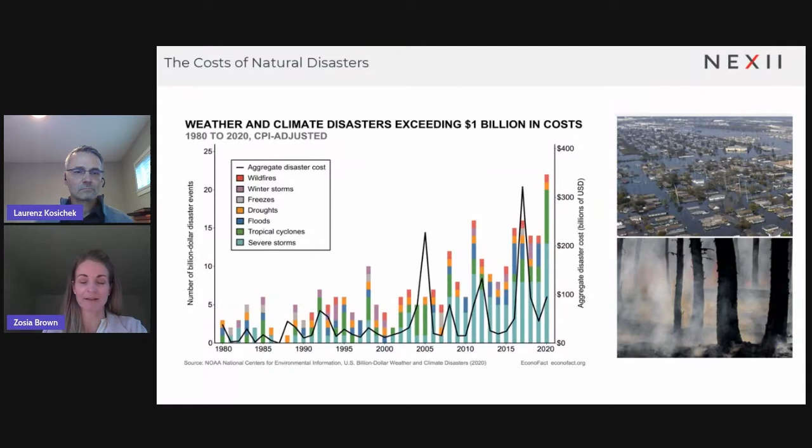Buildings and construction are a key part of both the climate crisis and climate solutions. We know that our industry represents 39% of global CO2 emissions, and that comes down to how we heat and cool our buildings, construction-related emissions, waste from demolition, and emissions tied up in the materials we select.

That number's been ticking up by 1% per year since 2010 and will continue to increase because we're building new buildings at an incredible rate.

The volume of buildings on Earth is expected to double in the next 40 years. That means it's absolutely critical that we design new buildings right, but also 100% of the buildings on the planet today are existing buildings. So we need solutions that can scale for both new and existing buildings to help us on the net zero pathway.

Materials are a huge contributor to this challenge. Cement in particular is a large emitter of global CO2, representing the 3rd largest emitter in the world if it represented a country. Steel as well, and this is important because the building sector is considered a market pull for materials. We consume up to 90% of concrete globally and 50% of steel.

There is a lot of pressure on these industries to innovate themselves, but it's also on us as a building industry to create innovative designs that favor low carbon materials.

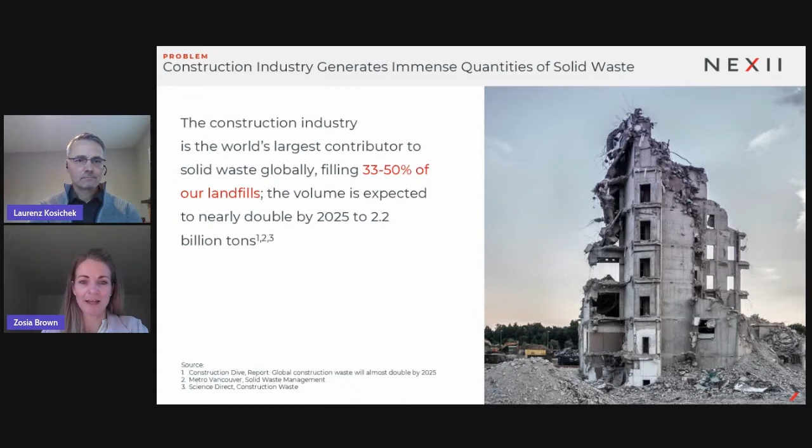And so we need to be thinking about both operational carbon and embodied carbon aspects of the built environment. Operational carbon means the emissions tied up with how we heat, cool, light our buildings and generally keep them running. The embodied carbon portion is emissions associated with extracting materials, manufacturing building products, transporting that to the construction site, assembling buildings, and the end-of-life emissions as well.

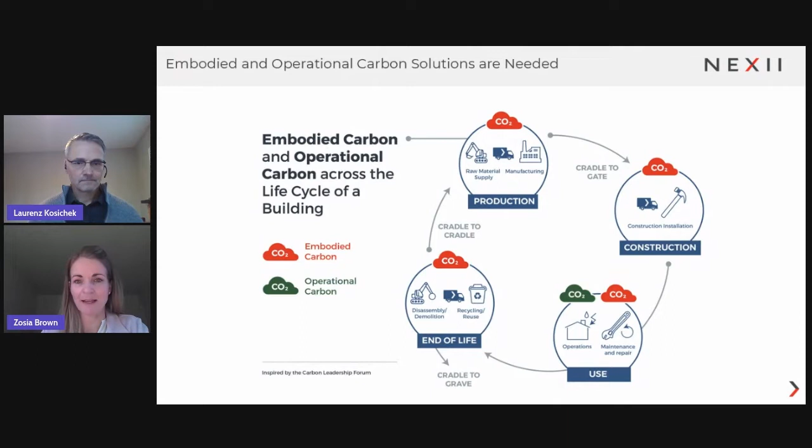We used to think that embodied carbon was a much smaller piece of the puzzle, but that is starting to change. This graph by the Carbon Leadership Forum shows where the key impacts are from embodied carbon.

First and foremost, it's right up front when we produce building materials and construct our buildings. And then you have a couple more hits during the building life from renovation and maintenance.

But what you see in the blue is that, whether the building is a standard performing or high performing building, operational carbon emissions are trending downwards. That's because our buildings are getting more energy efficient by code, and the energy grid is gradually getting cleaner.

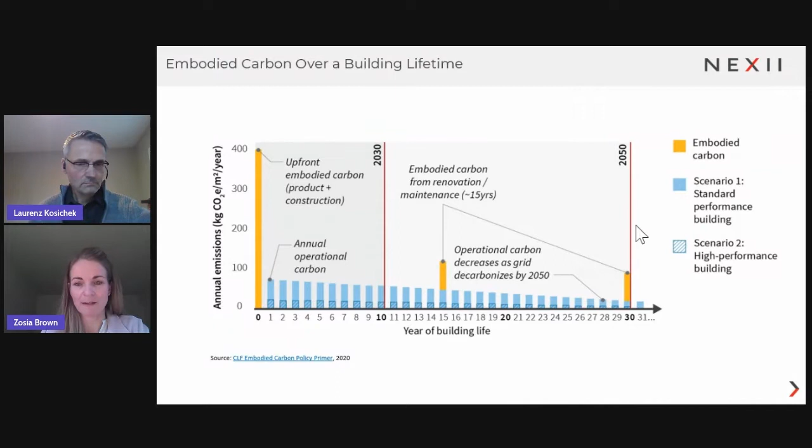So that means embodied carbon emissions are going to take a much greater role as we evolve here. AIA and Architecture 2030 estimate embodied carbon will represent 50% of building-related emissions by 2050. So that's just an overview of a number of global mega challenges we're facing and how NEXII is specifically aligning ourselves to meet multiple of these challenges at the same time.

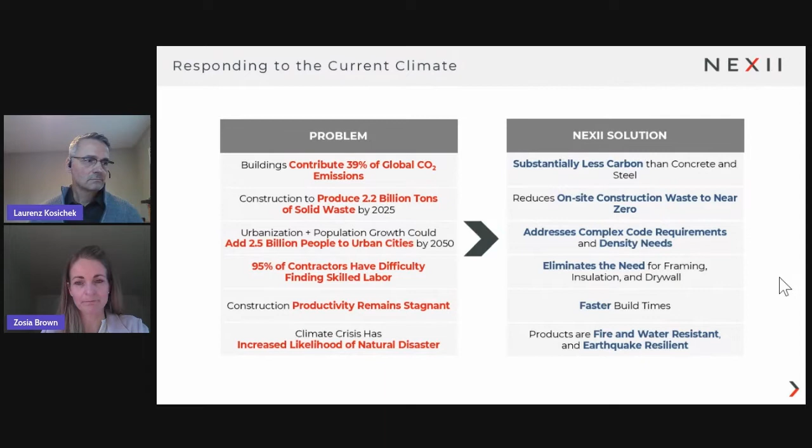So where do we need to be by 2050? Well, science tells us that if we want to hold off on some of the worst climate impacts, we need to limit global temperature rise to 1.5 degrees Celsius above pre-industrial levels.

And to do that, there's two numbers to bear in mind: one is half current emissions by 2030, and two is net zero emissions by 2050. What we can see from this graph from the IEA, which just came out last spring, is that our window is incredibly narrow. It is this decade that we need to really shift and decarbonize all sectors of the economy to get on this net zero pathway.

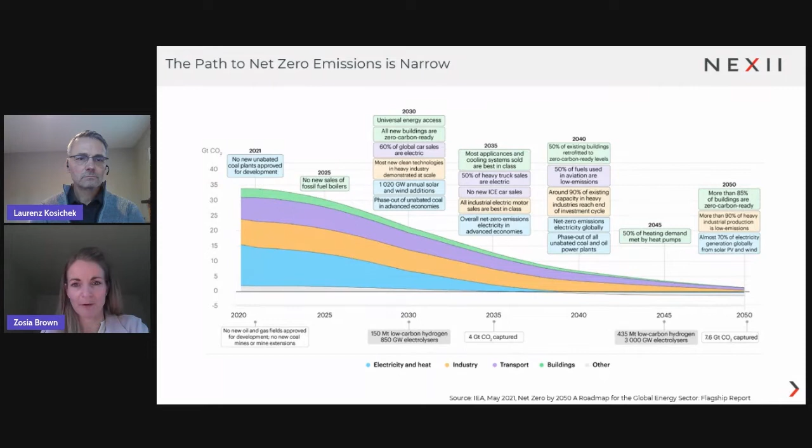So we're talking about massive deployment of all available clean tech within the next nine years, and tripling the speed of efficiency progress. Buildings are a key part of that. And the good news is that we know near-term emissions reductions really do work—every ton of GHG we avoid really does slow down global warming.

So for buildings, it's about energy efficiency. It's about reducing demand first. It's about electrification, providing that energy from clean, renewable electricity. And if we can generate that on building rooftops, even better. There's also a big piece around behavioral change—how we consume energy in our buildings, but also the behavior of designers and the building industry in selecting and designing to support low carbon materials.

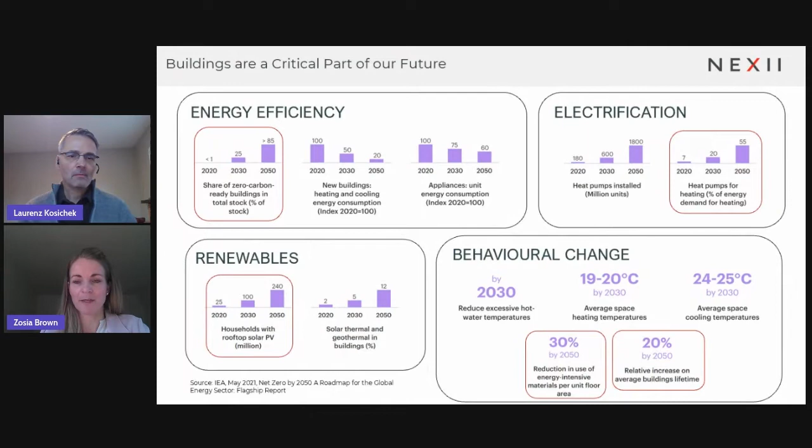So in summary, how do we get there by 2030 or 2050? Really thinking about low embodied carbon materials, zero emitting new construction and renovation. We want all new buildings to be zero carbon ready by 2030, and the vast majority of existing buildings to be zero carbon retrofitted by 2050.

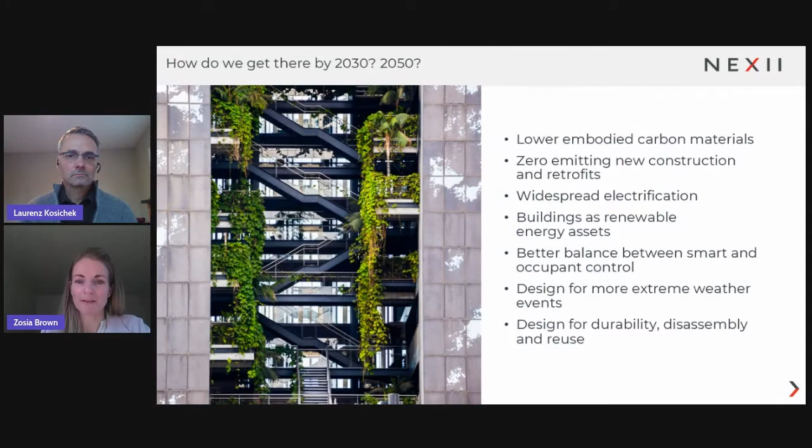We've talked about electrification, renewable energy, getting a better balance between smart and occupant control, and then really designing for more extreme weather events and an increased range of environmental conditions, as well as designing for durability, disassembly, and reuse—thinking really hard about embodied carbon in buildings and whether demolition is necessary.

The good news is that momentum is building to support this net zero carbon transition in our sector. We know that, thanks to the creativity of the design and construction community, we can achieve zero emission buildings in any climate worldwide now.

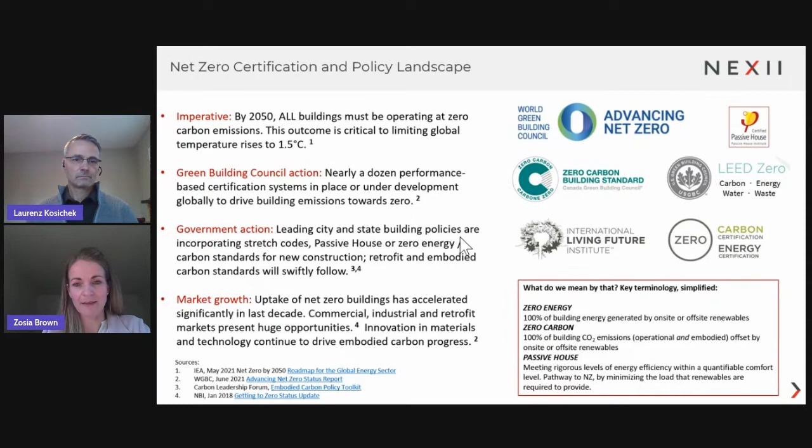And so we're seeing a real alignment around the standards landscape here, whether it's CAGBC, USGBC, or the Living Future Institute—BREEAM and others are all really aligning around this zero target: zero carbon, zero energy, and zero emissions. And likewise, the government sector and policy is also aligning around this effort.

Lots of momentum building with city and state policies leading the way. We have ASHRAE and IECC both anticipating net zero performance to be required in their next set of standards—California, Washington DC, and here in BC we have a step code for buildings where the highest step is zero energy ready, that's for all new construction by 2032. So really great momentum supporting the transition.

Unlike the automotive sector, the building sector hasn't focused on performance metrics historically, and buildings aren't often designed to be able to track performance and use.

Examples like step and stretch codes, zero emission policies, passive house standards—a great example—and net zero certification pathways are shifting that. So we list a number of performance metrics here: total energy use intensity, GHG intensity, that are going to be much more important for the building sector to start to produce on a regular, consistent, and verified basis.

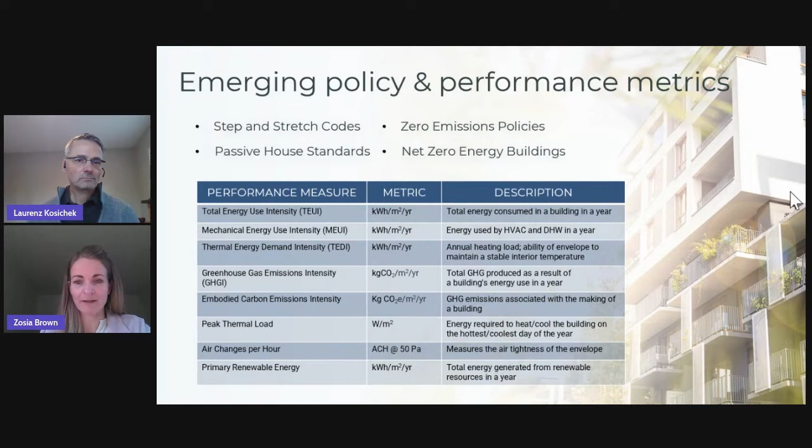And embodied carbon is included in that list as well, as being one of these emerging metrics that we're going to be paying closer attention to.

So what is, how do we measure embodied carbon? Well, it's life cycle assessment, LCA, which is a framework for measuring the impact of a building or a building product across its entire life span.

And the goal of LCA is not only to create data, but also to facilitate decision-making from a designer standpoint, but also in specifying materials.

And so EPD, or environmental product declarations, are the sort of emerging nutrition label for building environmental products. And that tells us how much embodied carbon is tied up in a unit volume of a building material, so we can compare between similar types of products. And EPDs are proposed for use in procurement, as well as supported by national and international databases.

And the reality is that many companies have no idea how they're going to hit their targets. So to date, we know that 50 countries and 21% of the world's largest corporations have net zero targets in place. And net zero is really based on a planetary perspective.

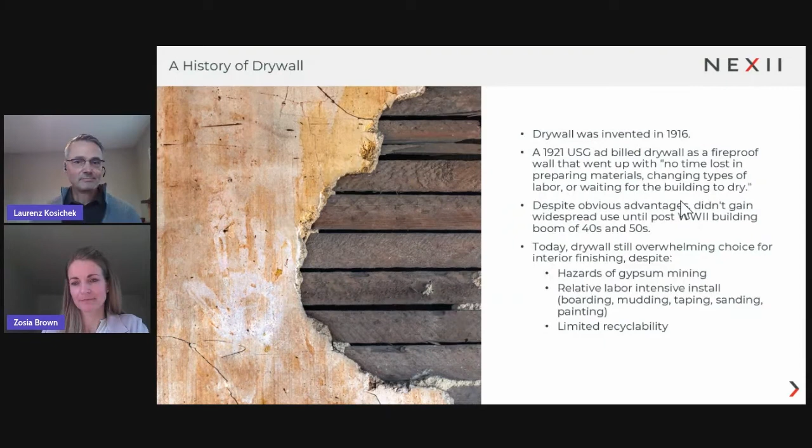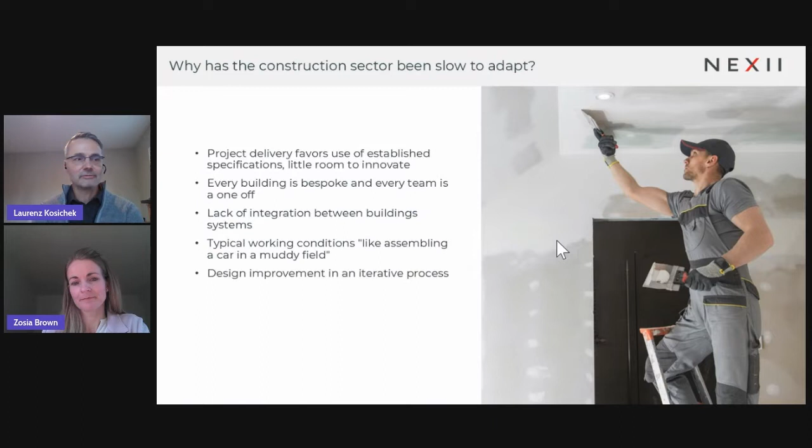So the industry itself favors the use of established specifications, and therefore established materials. The A&E industry is really risk averse in a lot of ways, and new materials are difficult to get accepted.

Additionally, every building is a one of a kind. I myself have practiced for close to 25 years, and have never built the same building twice. And even if I did, it would be a completely different team of contractors building that. So on almost every building, there's some new learning that goes on.

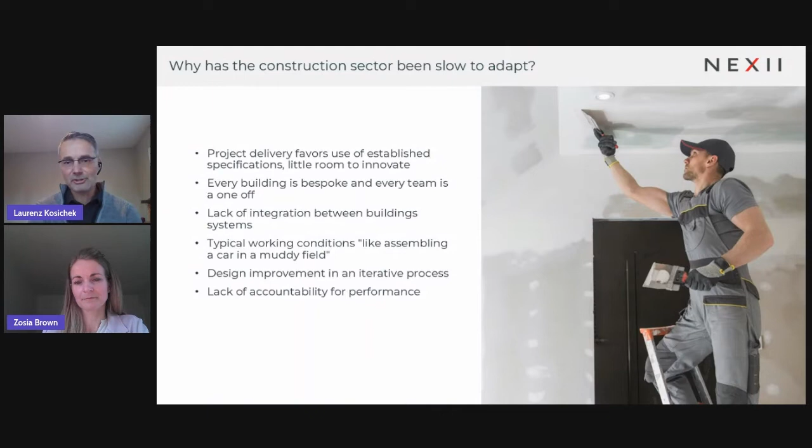And of course, we all know that there's a lack of integration of building systems in the buildings themselves, and oftentimes we're not even designing for that. Generally, on a construction site, the first trade to get in there gets the best location to run their system. All others that follow have to work around them.

And for all of you that have been on a construction site, that fourth bullet about putting a car together in a muddy field sounds fairly accurate. Definitely on a lot of the sites that I've been on.

So design improvement is an iterative process, and you can't do that when you're always doing a one-off. And lastly, there's obviously a lack of accountability on performance. Those of you in the A&E industry have likely seen projects where deficiency lists are like small novellas, and often take months and months to get through.

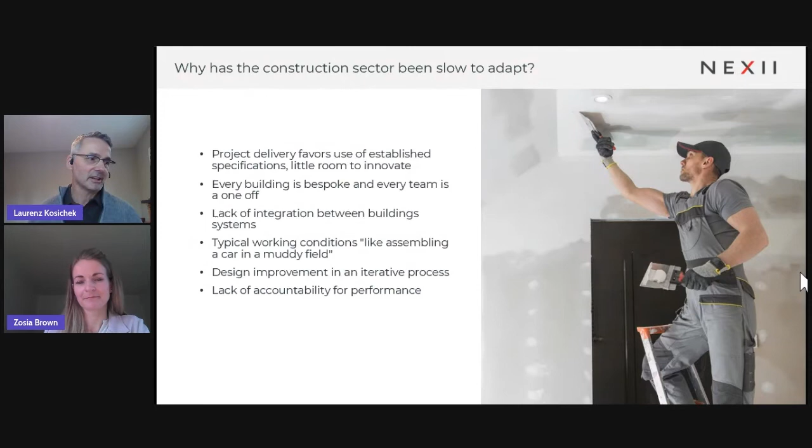So let's look at a panelized solution for today's design challenges.

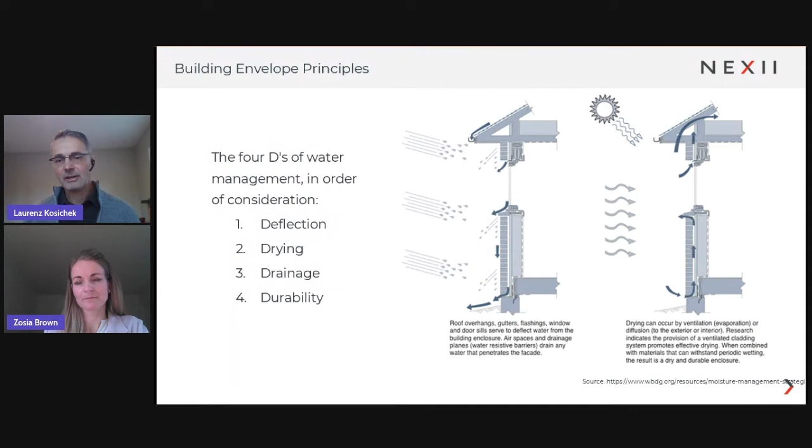I think this is a great slide. It really points to the complexity of our building envelopes at this stage of the construction and design industry. There's a lot of challenges with them.

The thermal layer, where do you put that, and how do you make sure that it's continuous, especially when you have structural components that have to go through? Where does the air seal go? We have at least 2 layers of insulation here. Does it go on the inside, in the middle, or on the outside? How do we deal with all the sealants and flashings, etc., and make sure that we can keep the water out?

And then how do we take this assembly, and there's about at least 12 components before we even get to the brick veneer. How do you transition that to a punched window frame, or a curtain wall, or a window wall? And then how do all of these components interact dynamically in varying freeze-thaw conditions and all hold together?

Now, the upside to that is exactly this diagram. We now live in a digital age where in the A&E industry, we model everything in 3D. And in fact, these sort of 3-dimensional details have found their way directly into our contract documents. We need them because when you are in the field doing this work, if you don't actually understand the 3-dimensionality of it, you'll never be able to get it right. And getting it right is the most important part of our building envelopes.

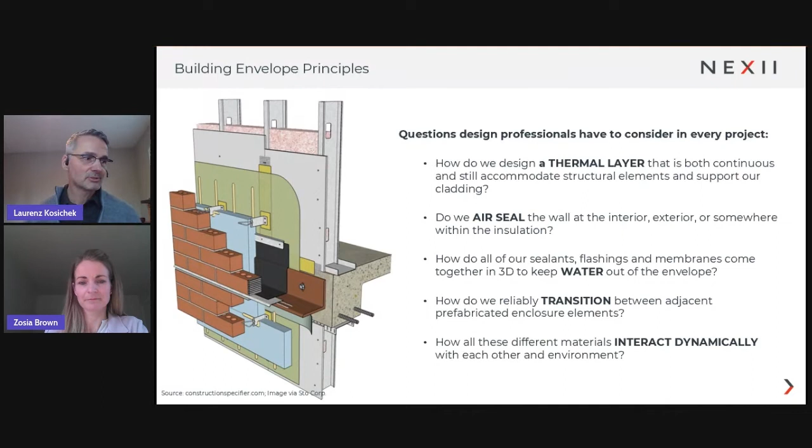So let's move on to some examples of conventional building envelope materials. I would argue that the ones on the far right, the curtain wall, window wall, or ornamental fiberglass, these theoretically could be whole building envelopes. Certainly there are lots of examples of curtain wall buildings that are completely wrapped.

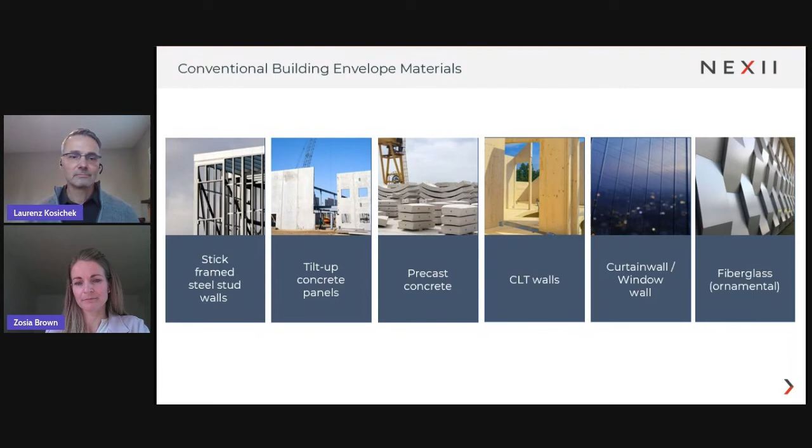I guess the ornamental fiberglass, maybe that would be a really funky TELUS data center that doesn't really need any windows, and so could become the entire envelope. Now the 4 on the left hand side are really components of a building envelope, but they're not the whole envelope. And that's part of the problem - they just deal with a component of that.

So let's move on and let's look at what Nexii has developed. I'm going to admit these photos are a little bit old, 3 years. That's a long time in Nexii time.

The photo on the far left, you're looking at two components, two panels attached together with two different finishes on it. The reality is with casting into form liners, we're able to cast a number of different textures into our panels. By applying paint or various colors of paint, we're able to achieve different looks and textures on that surface. The panel in the middle is showing the backside, and the darker color is actually the color of the Nexiite. We would generally send it to the site with a primer coat on it so that the finish coat could be installed on the site.

You'll notice these HSSs in the corners, called corner blocks. We have developed our connections further than this older image, but it's really the same process. We bolt our panels together, we bolt them to the foundation, and we bolt roof panels to wall panels. It is fully like a large Meccano set, for those of you who remember that.

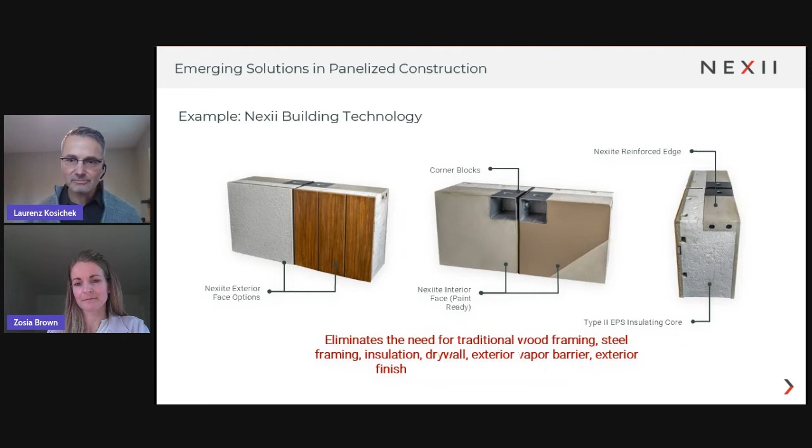This gives you a little more detail on the actual sandwich of that panel. Again, on the left side, the exterior face, all the things I described: the face, the rain screen, the Type 2 EPS core.

We add a layer of FS, which is our version of Nexiite for fire and sound. Half-inch of FS provides a half-hour fire rating, and then we have another layer of ST on the inside. ST stands for structural, so we have a structural skin on the outside and a structural skin on the inside. That structural skin ties to the thickened edge and often all the way around to the exterior face as well. With 8.5 inches of EPS Type 2, we get our R-34.

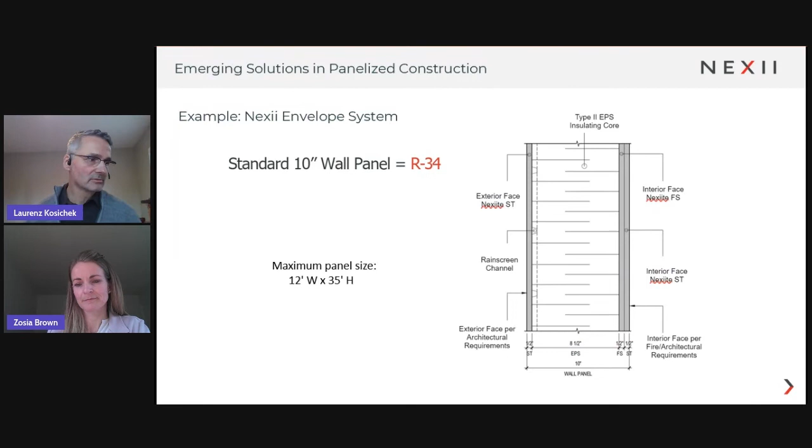Our maximum panel size is approximately 12 feet wide by 35 feet in height or length, and our panels can go horizontal or vertical. Let's head to the next slide.

So what are the advantages of a Nexii panel or a panelized solution? I love this first one, material supply chain predictability. That was probably accurate when it was initially put into this slide deck. As we all know, that is not the case today. However, in the future, as Nexii grows and locks down consistency in the types of panels we're producing, we'll be able to buy in bulk well in advance of projects arriving through the door.

So that we have product on hand for our panels. The rapid assembly is obviously key here. Typically, a panel can be installed in about half an hour, maximum time. And of course, that gets us to closing the building in as quickly as possible, which is always a desired effect. There's a higher potential for systems integration, and we do that quite often. Any penetrations through our panels, we like to coordinate all of those in advance.

I talked about manufacturing in a facility. In fact, our Moose Jaw facility is ISO certified, so there's a high degree of quality control and quality assurance. There's definitely cost savings available when there is repetition of a panel—then it gets easier for us. One drawing that can make dozens of panels obviously makes life easier. There's significantly less construction waste in our process than conventional construction, and the repetition of the process gives us an opportunity to learn, innovate, and make it better.

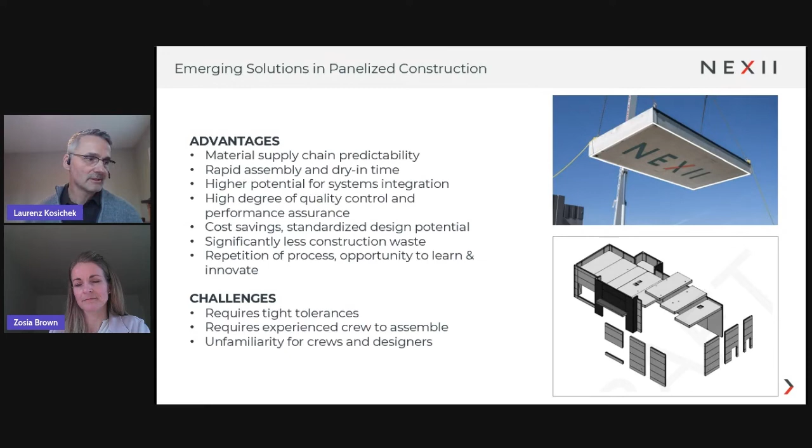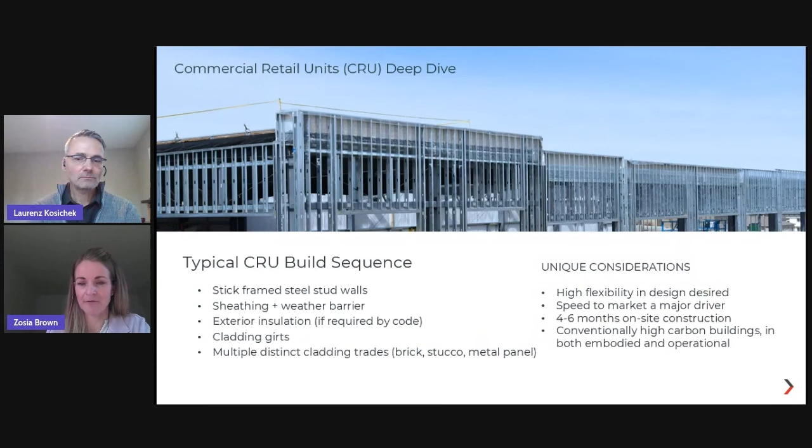Conventional CRU, or commercial retail unit, buildings tend to be high carbon, typically made out of concrete or steel stud, high in both embodied and operational carbon. They can take 4 to 6 months of on-site construction, where speed to market is a major driver, and generate a ton of waste along the way. So here's a video of how our Starbucks came together.

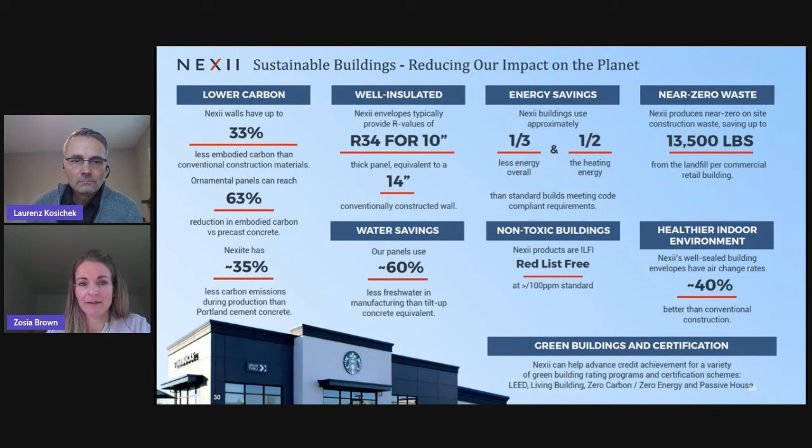It's a snapshot of our green metrics to date, kind of averaged across our projects. We're committed to tracking our performance, the performance of our panels and the buildings we produce, for every project, and working with third-party verification for as many metrics as possible across the board—embodied carbon, water, R values and air tightness, energy savings, and healthy materials.

So what's next for Nexii? We're looking at an example of an integrated technology partnership we've got with a number of key marquee companies, including Siemens, Trane, and Honeywell, where Nexii provides a very high-performing building envelope, and we work with leading technology companies to help us with extremely high-efficient systems, building controls, smart appliances, integrated solar PV, etc.

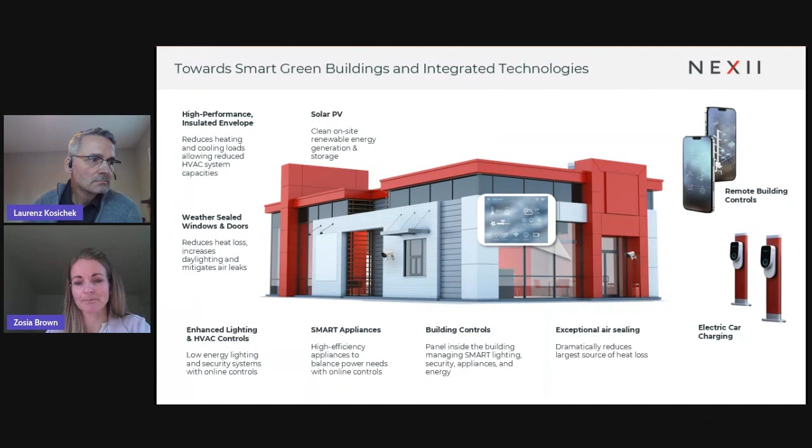So essentially, it's a kit of parts that's net zero ready, and this is something we've got actively under development, hoping to deliver our first building of this kind by the end of the year.

Most of our presentation has been focused on our environmental impacts, but at Nexii, we're very much thinking about the triple bottom line—thinking about a purpose-driven company that wants to drive low carbon growth, but that also means creating jobs. It means equity and inclusion. It means we're focused on our communities and transforming living standards, having a product that's available to all, and really focused on that community resilience piece as well.